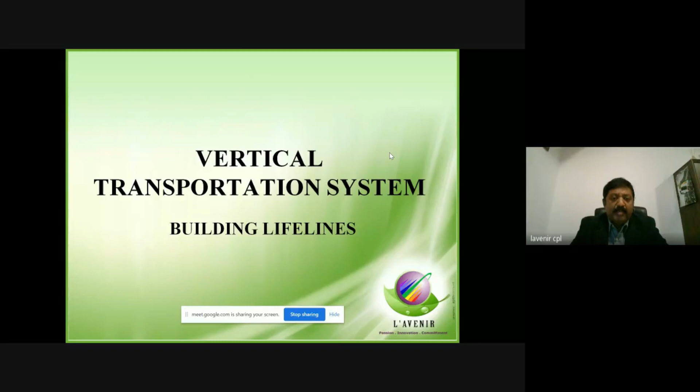I also publish a magazine called Elevator Digest to give a better insight into elevator technologies, firms, and emerging technologies in the field of vertical transportation. So what is vertical transportation? A high-rise building, like 10 floor or 15 floor, cannot happen without elevators, not possible. So typically these vertical transportations are like building lifelines. Now what are the products when I say vertical transportation consists of? They consist of elevators, escalators, and moving walks, or travelators as you can call them. These are the three important products which constitute vertical transportation.

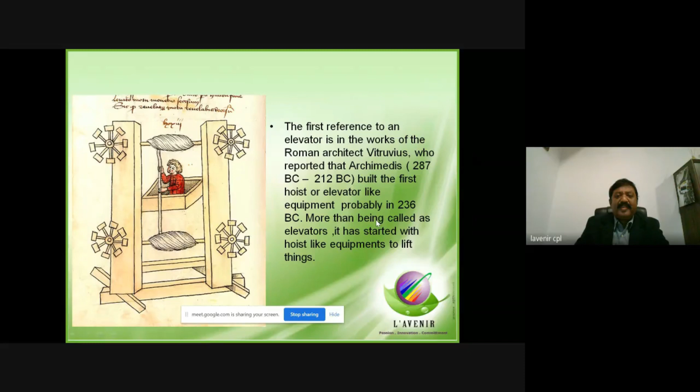So we'll start with elevators, we'll go a little bit into the elevators. The first reference for elevator is in the works of a Roman architect called Vitruvius in 236 BC. It was not like an elevator, but it was more like a hoist, meaning it had a weight as well as a counterweight. With the help of a pulley, it was moving up and down to lift loads, taking the mechanical advantage into view. So probably the first reference given to elevators was in 236 BC.

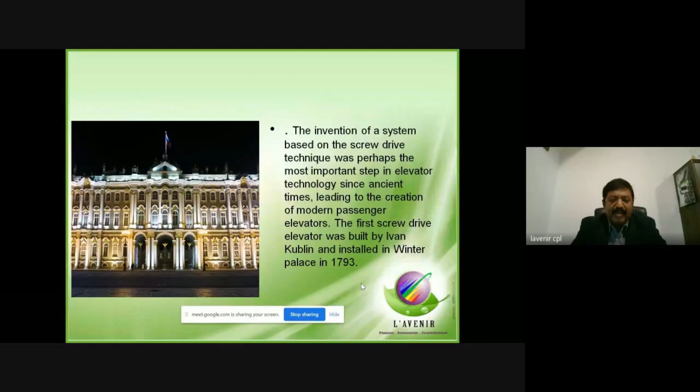Then there were a lot of technologies evolving as buildings started going up. People felt there is a need of a mechanical system where goods or people can be moved up and down so that they can build vertically. One of the technologies, as you can see on the screen, was at the Winter Palace in Russia, where Ivan Kublin built in 1793 a screw gauge using a screw drive technique. He constructed an elevator sort of thing, paving the way to a modern passenger elevator, you can say.

Again, in 1823, London had a tourist attraction called Ascending Room, built by two enthusiastic architects called Burton and Homer. It was designed as a tourist attraction where people could go up and have a panoramic view of London. So it was one of the first elevators, you can say, designed for public use, in the London Coliseum.

So while elevators were being built with various crude technologies available, whenever there were no safeties involved, in the sense whenever the ropes were cut or something like that, the elevator could fall. There could be a danger of people getting hurt.

So finally, in 1853, a gentleman called Elisha Graves Otis demonstrated his safety elevator in a very dramatic fashion in New York Crystal Palace.

What he did is, he had a platform with ropes. He raised the elevator or platform up to a certain height, and cut off the ropes. The elevator started falling down, but it stopped there because of the safety mechanism, or safety lock - in other words, a clutch mechanism which holds onto the rails on which the elevator was traveling up and down. He proved to the world that a safety elevator will not fall down.

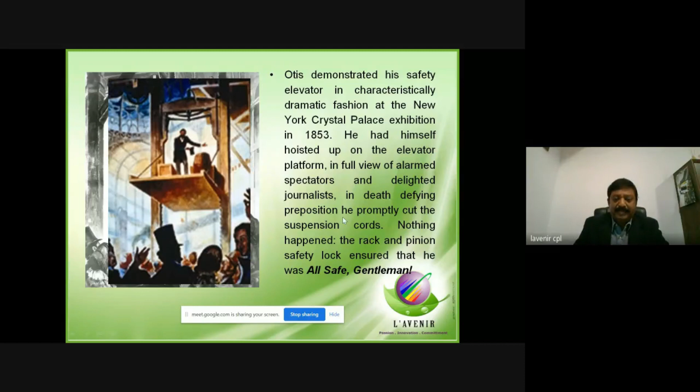So when we speak of elevators, there is a certain scientific study involved, which in elevator parlance we call traffic analysis and planning. For example, if you take a 15-storied IT building, it could have 15 floors with a population of 5,000 people. This is the basic input you have been given.

I'm sure all of you are aware of National Building Codes. National Building Codes Part 8, Section 5A covers elevators, Section 5B covers escalators, wherein there are certain directives on how the traffic coming into the building should be addressed - meaning people entering the building should comfortably, within the comfortable waiting time.

The elevator traffic should take them to their destination floor, and they should be comfortably traveling throughout the day - during the morning office up-peak, during lunch hour, or during down travel while going home in the evenings. So the objective of traffic study is to recommend or propose an ideal vertical transportation system where the handling capacity equals the traffic flow at the critical period with acceptable waiting interval.

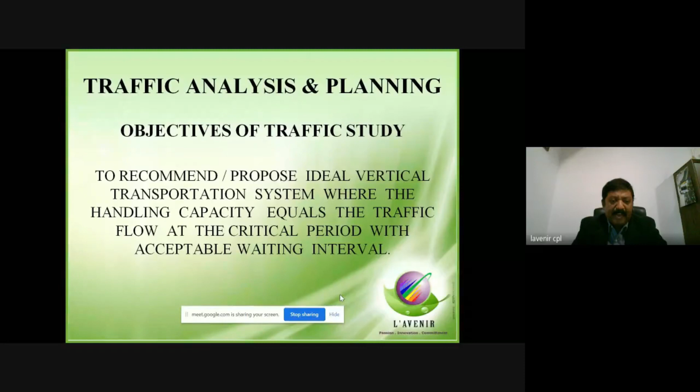How much percentage of the population is handled within a 5-minute period during peak time is called handling capacity, or the quantitative parameter. The qualitative parameter is waiting interval, within 25 to 30 seconds. There are certain guidelines given for waiting interval, which you can see in the upcoming slides, along with handling capacity.

So the key considerations for vertical transportation are: quantity of service, which is the handling capacity; quality of service, which is the waiting interval; and the traffic flow. Mainly we look at the up-peak or busy hour, so that elevator design can sustain itself for busy hour. How elevator operations are looked at is another part.

Like single elevator - I'll come to that in detail. A group of elevators can be grouped together, meaning if 6 elevators are there, they talk to each other, and whichever elevator is nearest will attend to the person who called it. It's very important to understand the population of the building, which is normally given by architects or the builder when the base or concept master plan happens.

Traffic study is applied mainly in residential complexes, shopping malls, hotels, hospitals, and infrastructure projects like airports and metros.

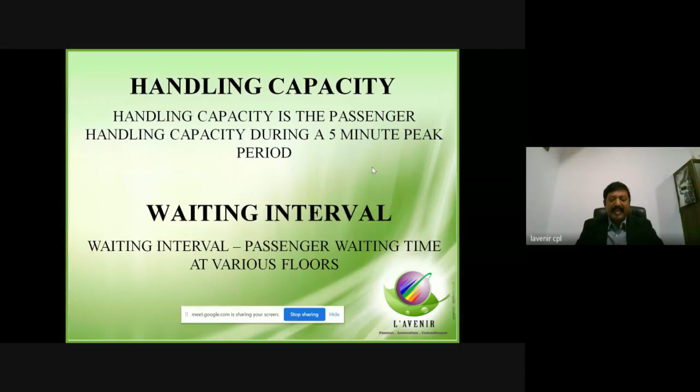Waiting interval is nothing but passenger waiting time at various floors between elevators. That means if there are 8 elevators, the interval between the arrival of elevators should be at certain desired levels, which we'll see in the subsequent slides.

Now, how did this happen and why are there different ranges of percentages given for different types of buildings? This is basically since elevators started, especially in Europe and the US—a lot of people, professors and vertical transportation consultants, elevator companies have been studying buildings, doing traffic studies.

Studies on elevators making trips from the ground floor to the topmost floor, stopping at various floors while going up, and stopping at various floors while coming down to the ground floor—so how many elevators should be provided? Based on various studies, over some 60-70 years, they have arrived at certain ranges that provide guidance to designers and consultants, so that if you achieve these desired parameters, you know the number of elevators provided is right for handling the building's population.

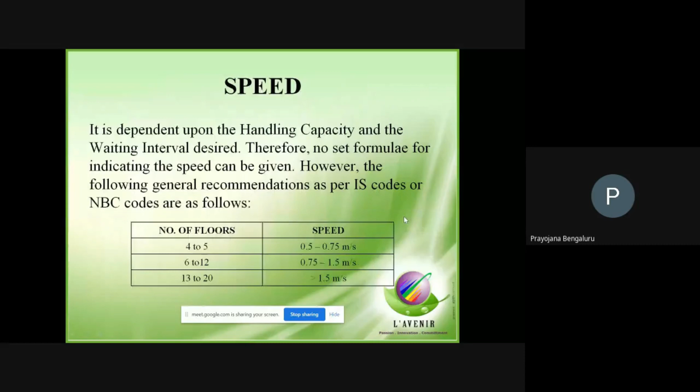NBC also recommends a thumb rule kind of thing: for 4 to 5 floors, 0.5 to 0.75 meter per second; for 6 to 12 floors, 0.75 to 1.5 meter per second speed; for 13 to 20 floors, greater than 1.5 meter per second speed; and anything above 20 floors, we will do a traffic study and provide the right kind of speeds.

In India, normally the highest speed we have given so far is around 6 meters per second. Even in Bangalore, in the center of the city near UB City Mall, Kingfisher Towers have 3 elevators running at 6 meters per second. There are quite a few elevators in Mumbai which are running at 6 meters per second.

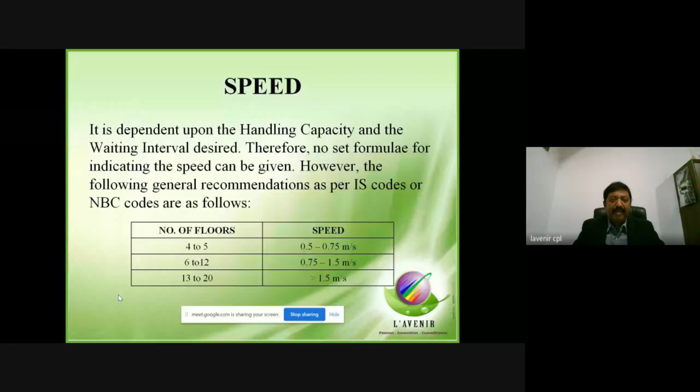Worldwide, the fastest elevator is in Shanghai Financial Center, which travels at 20 meters per second. In Dubai, Burj Khalifa's elevator runs at 12 meters per second. So depending upon the number of floors it has to cover, the speeds can vary, and speeds also have an effect on humans, which we will study as we go into the presentation.

Thank you. So now we look at machine roomless equipment. Machine roomless equipment is nothing but there being no machine room. Everything else is the same - pit, travel height or rise, overhead - all the same as machine room equipment because the speed and everything matches. So how does machine roomless vary from machine room equipment?

Machine roomless equipment was actually derived keeping the architect's design perspective in view. That means, if you see a nice building with a good elevation, that elevation could be spoiled by the machine room jutting out.

So what they did is they wanted to see if it's possible to accommodate the entire elevator equipment within the shaft, eliminating the machine room. In an IT building of 15 floors, when you eliminate the machine room, or if the terrace floor is devoid of any machine room, you get good floor space for various activities. Maybe a canteen can be provided, a beautiful garden can be provided. It leaves options to your imagination. So how has a machine roomless elevator come into picture?

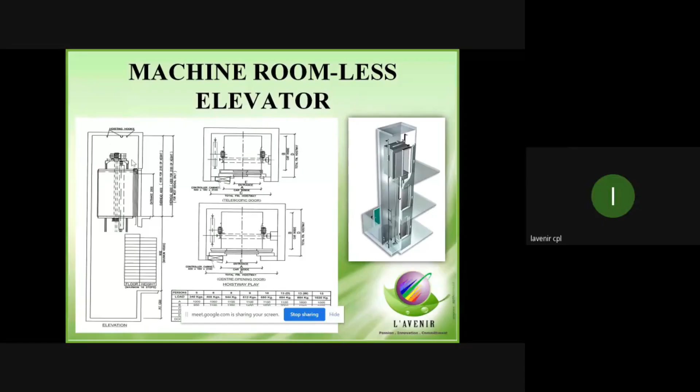In a belt driven system, the bending radius of the belt is almost 1/10th or even less than that of a steel rope. So when you bend this belt, the required shaft is small, the pulley is small, the shaft to run the pulley is very small, and the motor capacity is small - it comes as a gearless machine. So gearless machines are introduced, and the entire machine runs on channels inside the shaft itself.

The controller is kept somewhere here, the machine is on the channels, and the elevator runs up and down. If a service technician has to service the elevator, he goes on top of the elevator cab and services the machine as well as the controller. So this is the advantage of machine roomless equipment.

The disadvantage of machine roomless equipment is also there. A normal rope elevator has a certain stretch. Assuming the elevator is traveling at a high speed of 3 meters per second, and suddenly there is a power failure, the elevator stops with a heavy jerk. Normally this entire jerk gets transferred into the elevator car.

It is not transferred into the elevator car for the simple reason that the ropes provided are stretchable to a certain extent. The rope stretch absorbs a lot of vibration and jerk, so that the people inside are comfortable.

So at high speeds, if you use coated steel belt elevators in machine roomless systems - as I told you, it is coated with a polyurethane belt - this is end to end, totally fixed, so there is no stretch possible in that. So the jerk felt in machine roomless elevators, if running at very high speed, is high.

Machine roomless is okay for speeds up to 1.7 meters per second or 2.5 meters per second. Of course, even machine roomless equipment with very high speeds is now being introduced, with proper UPS kind of technology incorporated into the elevator.

So while we have understood the section, I will cover the plan. You can see the shaft here. This is the brick wall with a front wall and doors inside, and there is an elevator car. You can also see the counterweight here.

In the elevator shaft, the elevator comes with rails, meaning 2 rails for the car to travel. A guide rail is like a train track, how it travels horizontally on rails, except the elevator travels vertically on rails, and even the counterweight travels vertically on rails. There is a fixed distance between the rails, which can vary based on capacities and car widths. It is properly designed as per National Building Code guidelines, which is for the product manufacturer to worry about, not for us.

When you go to the top view, you can see the shaft here, the elevator car, and various squares which are all rope cutouts where the elevator ropes come into the machine room, travel over the pulley, and travel down again to the counterweight. You can also see a trap door, a machine room door, and windows for cross ventilation. This cross ventilation is very important to ensure the elevator machinery does not heat up as much.

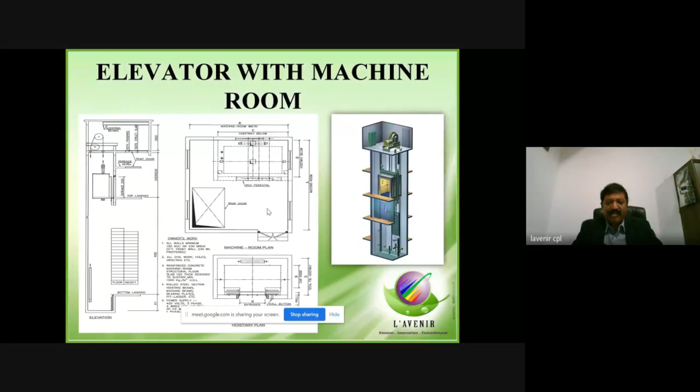So there are quite a few other technologies which are energy efficient. I'll come to it when we discuss green lifts.

Mr. Ashok, I hope so far it's clear, right? Yes, sir. Yes, sir. Yes, sir.

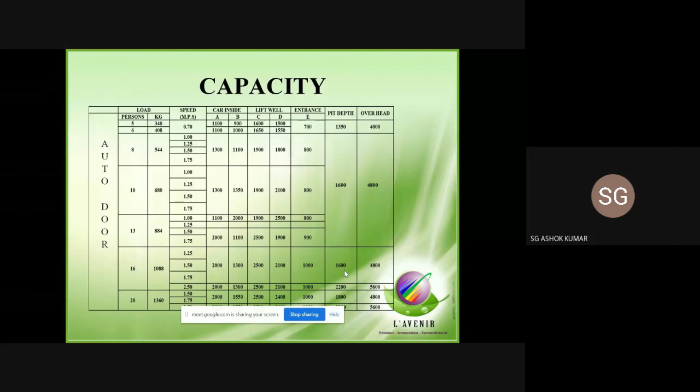You can proceed. Now, just to have a look, we have heard a lot of terms like elevator capacities, elevator speeds, elevator cars, elevator lift well or shaft sizes, elevator entrance widths, pit depth and overhead. For an auto door in general, let's take an example of a 10 passenger, 1.5 MPS speed elevator.

A 10 passenger capacity is 680 kgs. Why 680 kgs? In India, as per IS standards and NBC standards, 68 kg is taken as the per person weight. Based on that, the recent recommendations we have given to the National Building Code and IS committees is to come on par with international weight standards of 75 kg per person on average.

So if you take 680 kgs as currently done, a 10 passenger elevator at 1.5 meter per second speed has a car width and depth of 1300 mm wide and 1350 mm deep. The lift well required for that is 1900 mm by 2100 mm deep.

800 mm is the door opening. Normally a standard door opening should be 700 mm, as you can see for a small elevator of 5 passenger or 6 passenger, which are normally used in standalone residences or villa projects. Pit depths and overhead are given here as well.

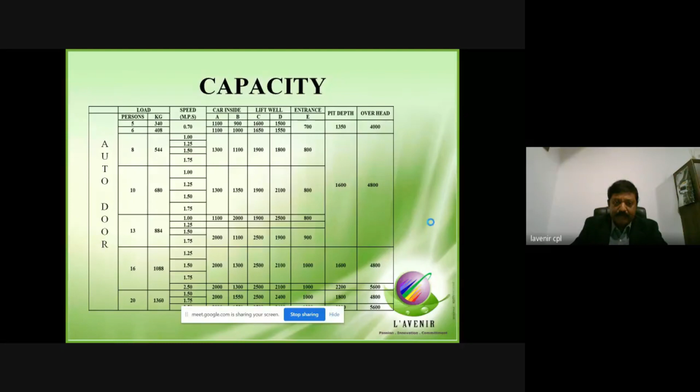Now we'll come to high-rise buildings and the elevatoring issues to be taken care of when designing for them. For example, we are designing for one building in Bangalore which is 54 floors, Presidential Towers in Yeshwantpur. In Hyderabad, we are doing a lot of office buildings which are 45 floors too. A high-rise building with high density population will have 5 meter per second, 6 meter per second speeds.

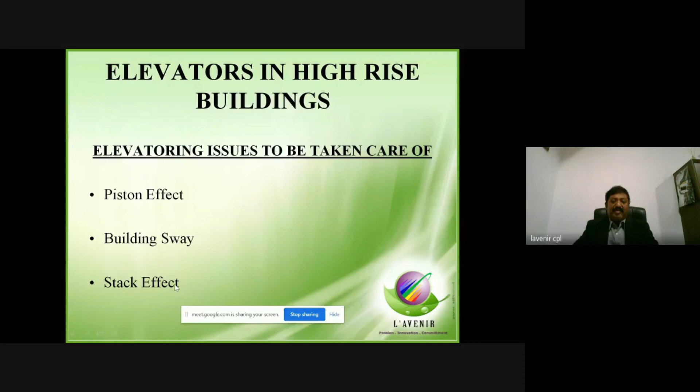Piston effect. Normally what happens is, in a single shaft, the shaft is covered by a wall and an elevator door, totally enclosed. Assuming an elevator is traveling at a rated speed of 6 meters per second, imagine a piston at that speed going in the enclosed shaft.

There is a gap between the elevator car and the hoistway. The air is displaced, and the displaced air travels at almost double the speed of the elevator. So if the elevator is traveling at 6 meters per second, the displaced air travels at 12 meters per second, which is very high. When it crosses the car, it can cause a lot of vibration and noise.

That needs to be mitigated. How do we do it? You need to provide a vent there to let the air go out. That means you have to design air vent holes to mitigate this piston effect.

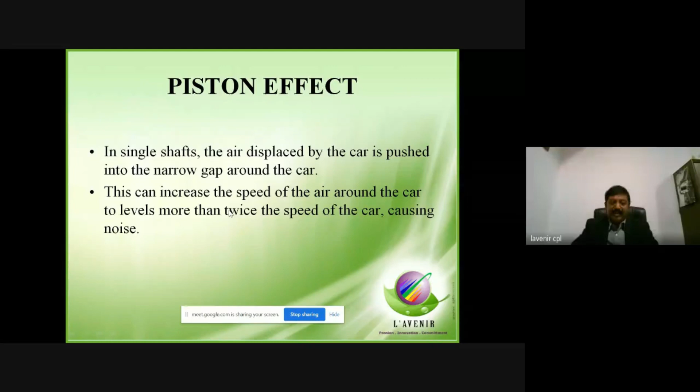So to reduce the noise level created by the air speed, air vent holes or pressure relief vent holes are needed. For speeds up to 2.5 meters per second, an air vent hole in the overhead area is required. Overhead area means from the topmost landing to the underside of the machine room floor.

For higher speeds, like 6 meters per second, you may require a couple of air vent holes at the bottommost floors, a couple in the middle floors, and a couple in the topmost floors, so that these pressure relief holes can be comfortably used.

It can be used when we have an adjacent shaft or an adjacent air duct. That means normally, when high speed elevators are provided, not just a single elevator is provided. There will be 4 or 5 elevators, as we told, forming a bank of elevators.

That means in the pit area, if you provide air vent holes in the partition walls, the elevator traveling in one shaft displaces air that goes to the next shaft, thereby moving air from shaft to shaft, creating relief and comfort to the people traveling inside, who are not affected by the noise or vibration created by the high speed of the elevator.

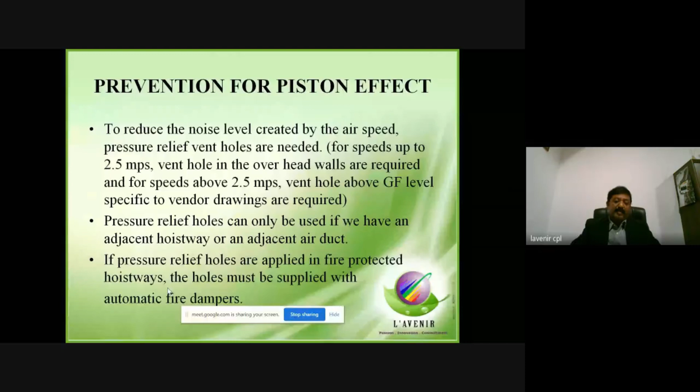Building sway: for example, if you take Freedom Tower in New York, or Burj Khalifa in Dubai, when you go to the top of such buildings, you can see that the building is swaying a bit, or there is a sway tolerance designed by the designers. This building sway matters because elevators, as we told, travel with the help of ropes.

The weight in the car and the counterweight in high-speed buildings are compensated by steel chains called compensation chains, overspeed governor ropes, suspension ropes, and the traveling cable. If these are long, over 150 to 200 meters, they tend to sway along with the building.

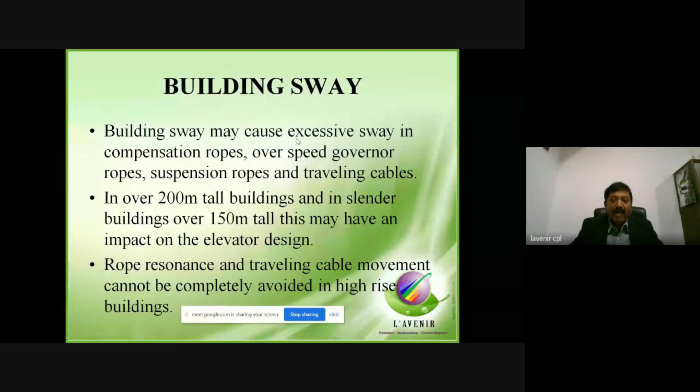So what we need to do is tell the product manufacturers to ensure there is an aerodynamic design given to avoid the building sway effect on elevators. So the sway behavior of ropes and cables is considered in the product design by the elevator vendors while installing the equipment, to prevent building sway.

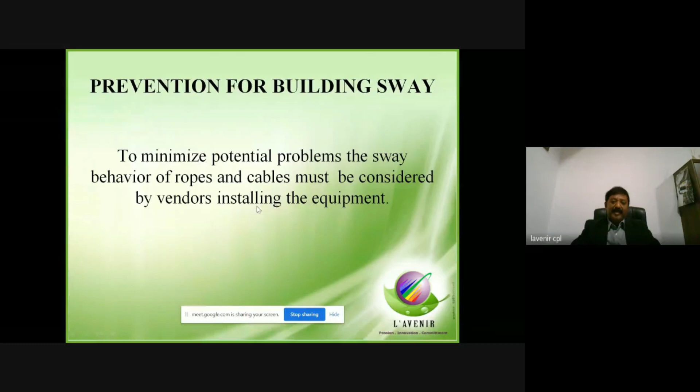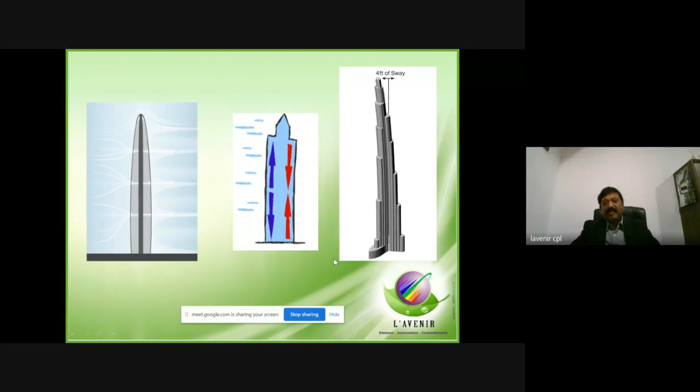So you can see Burj Khalifa has got 4 feet of sway. To mitigate that, various equipment is used, and elevators are one of them. So the product design has to be such that it takes care of this 4 feet sway.

Now something called a stack effect. Stack effect is nothing but the movement of air into and out of the building, driven by buoyancy, that means air pressure differences.

Normally in most IT buildings, the lobbies are fire protected, meaning they are controlled by air conditioning. If the elevator lobbies are fire protected, you don't really require mechanical ventilation or a fire ventilation shaft to the elevator shaft. If the lobbies are all fire protected, the pressure maintained is the same, so the fire cannot enter into the lobbies, and thereby the elevators are safe.

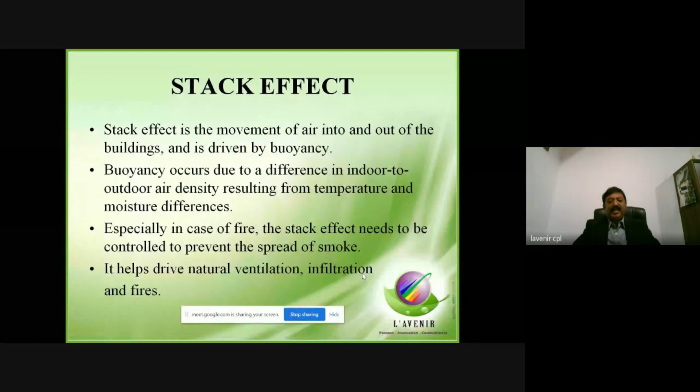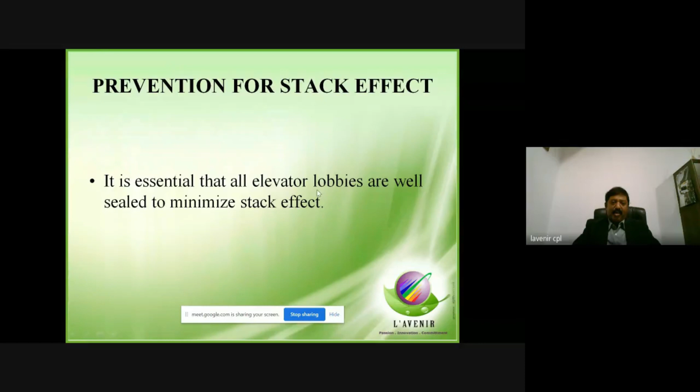So it helps in driving natural ventilation, infiltration and fire control. So for stack effect, it is essential that all elevator lobbies are well sealed to minimize the stack effect.

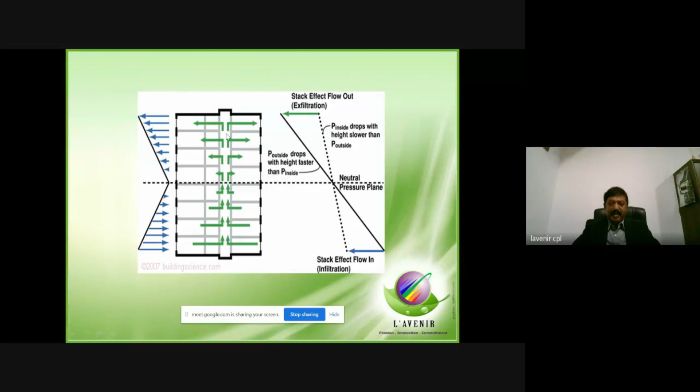So here you can see the air pressure, how the movement of air pressure is happening.

This gives rise to a lot of questions, like how to ensure smooth people flow when serving all the floors. That means what kind of traffic study is needed such that wait times are no more than 30 seconds after hitting the call button, how to gear up for an emergency like earthquake or fire, and how to consider depressurization in the cabin in less than 30 seconds and build a powerful braking system.

So if there is a fire in Burj Khalifa and somebody is on, say, the 140th floor, what happens? Can elevators be used in case of fire? Normally you would have seen signage saying that in case of fire, do not use the elevators.

Yes, that still holds good for India, because in tall buildings like Burj Khalifa, there are certain emergency evacuation high-rise building requirements where emergency evacuation elevators are provided at certain fire refuge floors. In construction or architectural studies, you would have seen that tall buildings are designed with refuge floors at certain heights, for example 4th floor, 8th floor, 12th floor, 15th floor designated as refuge floors. These emergency evacuation elevators serve those refuge floors, with separate lobbies created, totally fire protected, and powered entirely by a generator or secondary power, not the primary power, so it remains 100% available at all times.

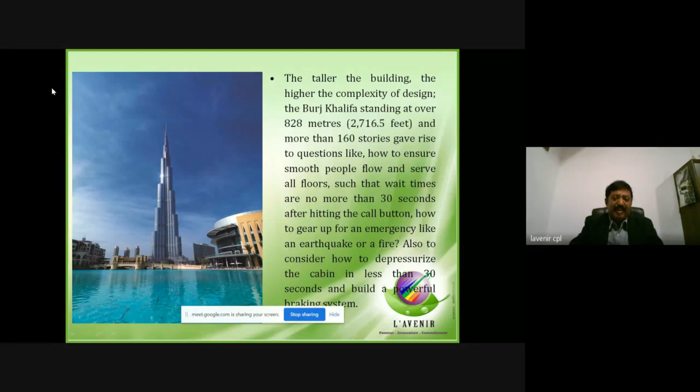So what innovations and intelligent, smart technologies are happening for future India? As I told you, destination dispatch control system. You would have seen in many buildings with 4-car or 6-car groups, you press the button and suddenly another elevator comes, and you rush to that elevator. Taking note of the elevator helps.

Normally when you press a button, the elevator sends a signal to the controller that a person on the second floor has pressed the button. Out of that 6-car group, the elevator controller senses whichever elevator car is nearer to you, and ensures that elevator will serve you.

In high peak situations, like 15-20% of the building population coming in between 9 a.m. to 10 a.m., more than group control, destination control systems are given. What does a destination control system do? It has a keypad showing the floor numbers, 0, 1, 2, 3, 4, 5, 6, 7. You press, say, 23 if you're going to the 23rd floor, and it will assign an elevator to you.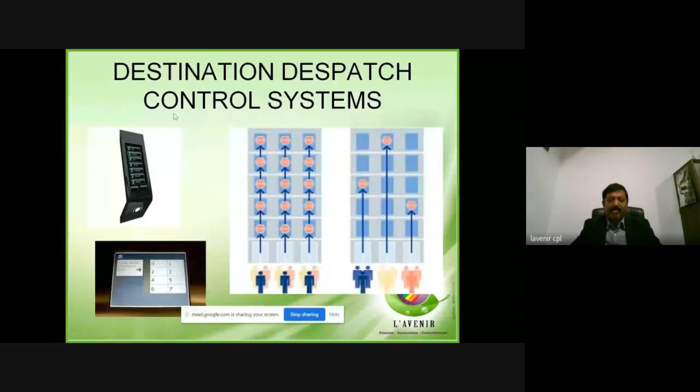Thereby, what is happening here? Your handling capacity becomes very efficient, your waiting interval becomes very efficient, and your equipment, the whole vertical transportation system, becomes very, very efficient because it is making only a reduced number of stops and starts. So this is a very interesting and important technology which is slowly becoming very common in most buildings.

Now, though we do not have this in India so far, you have something called double-decker elevators. These double-decker elevators are useful where land scarcity is there in certain buildings, like the financial capital of India, Mumbai. Mumbai has land scarcity. There, a building is designed, but they may not be able to provide enough shafts.

The building may require 10 elevator shafts. Now, if you do not have the space for 10, you can look at double-decker elevators. Thereby, these 10 elevator shafts can be reduced to 5 elevator shafts, and the elevator shafts are one above the other. People can travel in the lower deck, people can travel in the upper deck.

Here, the design has to account for this when you design double deck elevators. Why? Because when the lower deck is at a floor, the upper deck also has to be in line with a floor. That means you cannot have floor height differences, this deck also has to stop at the level of the elevator cabin as well as the floor level. Now in double deckers there is a little flexibility, where the elevator has a certain hydraulic system that allows a certain movement after the elevator stops, thereby addressing floor height differences of about 300 to 500 mm. You can still use a double decker.

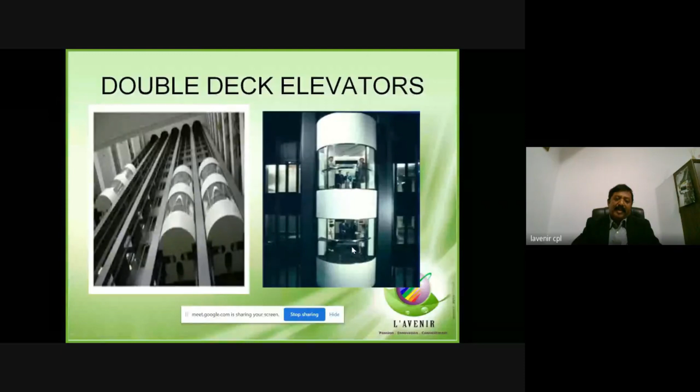Now when you are on the ground floor, you can take the lower deck elevator. How do you take the upper deck elevator from the ground floor? You need an escalator to go up, that means technically you will have 2 ground floors. So signages are very important in double decker elevators, where people designated for the upper deck will take an escalator, go to their upper ground floor, and then through a destination dispatch system key in their designated floor, the elevator comes and they move up.

Now there is another interesting technology also available, called twin, where 2 elevators travel independently in the same shaft. A German multinational called Thyssen manufactures this in their German facility, where I have actually seen this in action, the twin elevators traveling one above the other.

There is no big technology involved, but what happens is you require a larger shaft. That means the lower deck elevator is a regular elevator with a machine room, rope and counterweight. Here what happens is the upper deck elevator is provided with the help of a pulley room, and through the pulleys the ropes are designed to travel to the end of the shaft, where there is a machine. So it travels above and this travels below.

The only disadvantage is the lower deck elevator cannot reach the topmost floor, and the upper deck elevator cannot reach the bottommost floor. But all said and done, it will save a lot of space, and within the reduced space you can have more number of elevators. This is called a twin elevator.

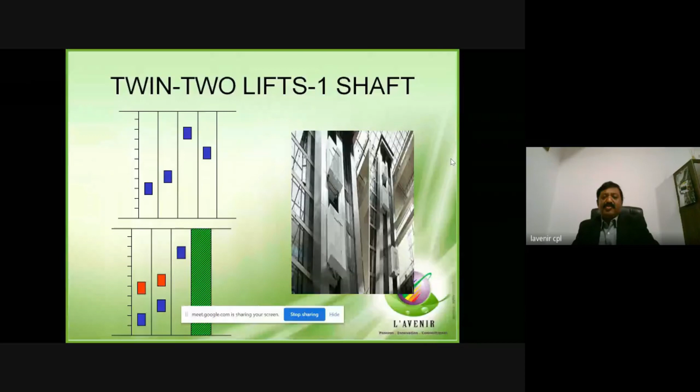For example, a residential complex with blocks A, B, C, D, E. You are on the 5th floor of block A, and you want to go to the 20th floor of block D. You can take one elevator from block A and reach the 20th floor in block D.

These elevator cabs work on a technology similar to bullet trains, which you've seen in China and which are coming to India soon. They work on magnetic levitation, meaning there's a gap between the rail and the train.

Similarly here, there is a gap between the elevator cabin and the rail, and at each designated floor there is a disc provided. When the elevator is traveling vertically, it comes and stops, with a disc behind it that is in line with the railing. The disc rotates so that the cabin moves horizontally and stops. If the disc rotates again, it can travel vertically.

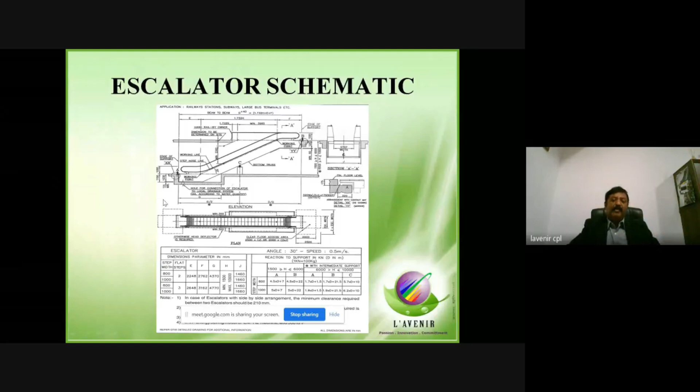There are certain innovations going on where for architectural purposes, spiral escalators are provided. I have seen these escalators in Caesars Palace in Las Vegas, where quite a number of them are provided.

Just to give you the complexity commercially, a normal escalator would cost around 25 to 30 lakhs. A spiral escalator of the same height would cost you around 8 to 9 crores. Yeah, you heard me right, it is 8 to 9 crores.

Now you can see moving walkways or the travelators. These are mostly used at a 0-degree angle to cover long distances where people do not want to walk, like in airports when you move from gate to gate in the terminals.

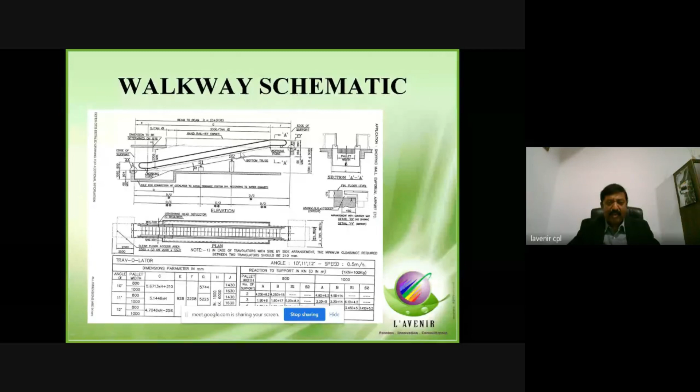And there is another use in hypermarkets. If you want to carry your trolley to the first floor of the hypermarket or supermarket, you take your trolley and go at an angle of inclination of 10, 11 or 12 degrees. This also has a step width like an escalator, like 800, 1000 mm or 1200 mm depending on the requirement. So this travelator is typically based on the same principle as escalators.

Because of the paucity of time, I'm rushing through a little bit. Now, what are the things to remember from a civil point of view when designing elevator shafts? You have to ensure that elevator lift wells or lift shafts are clear plumb sizes. All plan dimensions given in the NBC, the shaft sizes given, are clear plumb sizes after plastering. So you have to ensure that tall buildings normally are given certain plumb tolerances.

Why are plumb tolerances given? Because as the elevator shaft progresses, there can be plumb differences. But while plumb differences can be there in the shaft, the elevator car has to travel in a straight line - there cannot be any plumb differences. That means as the elevator travels, there is a guide rail to the left and a guide rail to the right, on which the elevator cabin travels. The distance between the guide rails has to be uniform.

If the distance between the guide rails is 2000 mm at ground floor, even at the 30th floor it will be 2000 mm only. So you can provide for plumb tolerance, not very much, to the extent of 50 to 100 mm in the shaft. That means the civil engineers constructing it and the elevator vendors involved in the project should check the plumb tolerance every 3 to 5 floors so as to avoid chipping later.

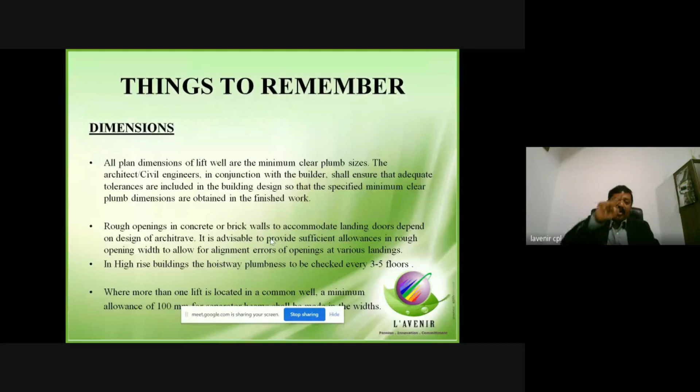And elevator shafts normally have to be constructed on 3 sides. The front wall should not be constructed till the elevator door entrance is fixed. Why? Because the elevator car is traveling, and the elevator car has a center line for the doors opening to left and right.

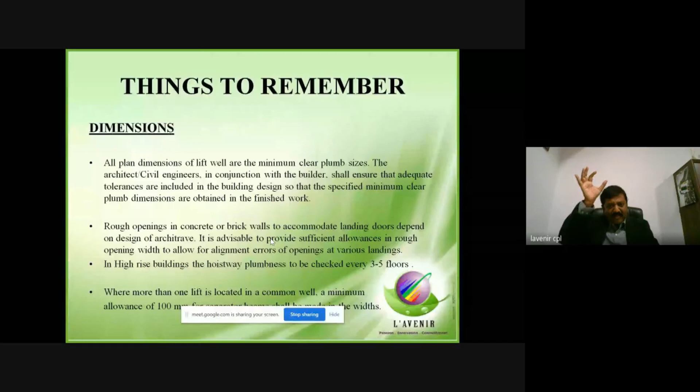Landing doors are provided at all landings. The center line of the landing door and the center line of the car door have to align correctly. How does this happen? When you take the plumb and align exactly all door entrances from floor 0 to the 30th floor in one single straight plumb line, then when the doors are installed, the alignment is very, very clear. So I'm spending so much time to stress upon you that this plumb tolerance is very, very important.

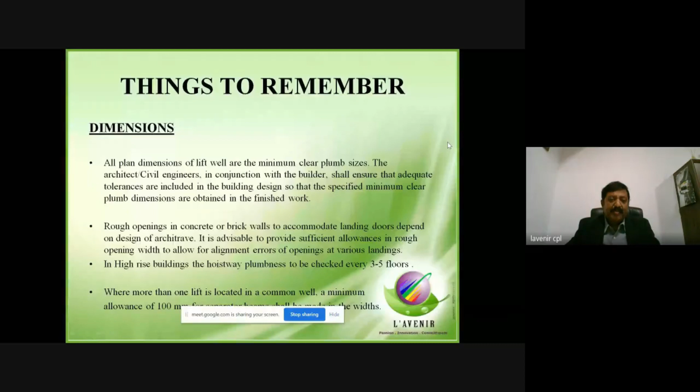Now, installation and maintenance require a lot of coordination. You need proper understanding on various equipment going into the building - the civil site engineer, the architect, consultants, lift manufacturer, electrical engineer, and mechanical engineer should have proper coordination. Information should be exchanged through design review meetings from installation through to maintenance.

Now all electrical works should align with the Indian Electricity Acts. The entire elevators normally conform to IS standards or NBC 2016 standards, which we are currently using. Then, as we have already discussed, there is conformity required with fire regulations, and there are regulations for the fireman elevator.

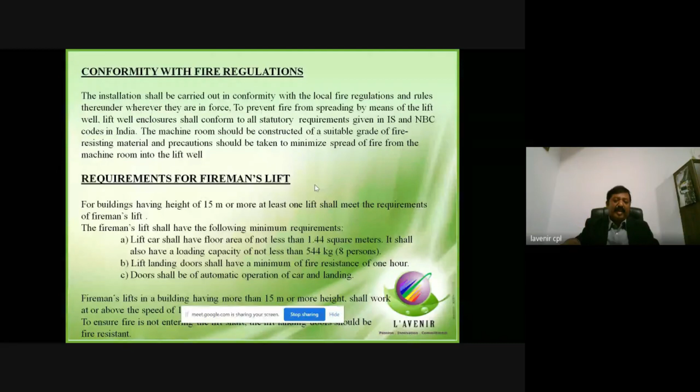A minimum building crossing a height of 15 meters should have one fireman elevator - that means 544 kgs capacity. The car area should not be less than 1.44 square meters, and it should travel at a speed of 1 meter per second.

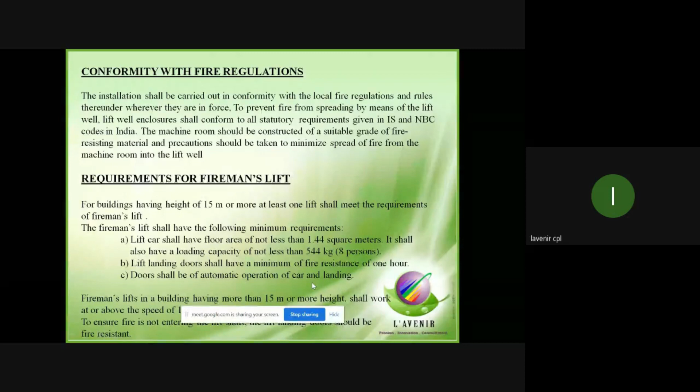Safety guidelines in construction site. All construction sites, till the elevator landing doors are provided, should be given entrance barricades, which the elevator vendor does. For scaffolding, nowadays mostly people are using steel scaffolding.

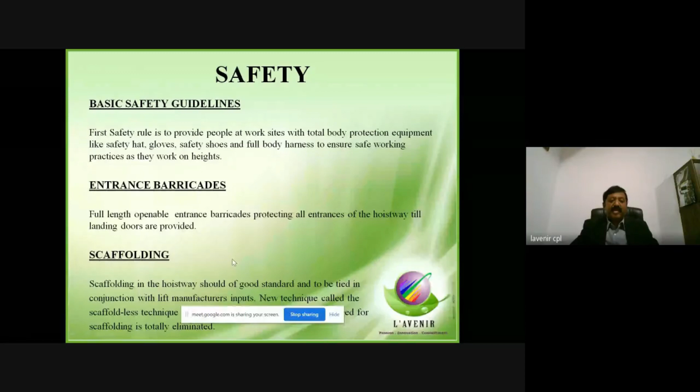There will be heavy duty safety nets provided in the hoistway at intermittent levels so that people should not fall down, and fall protection on the car top so that any tool falling down does not hit people working below. Normally in an elevator shaft only 2 people are allowed to work at a single point of time, because if 3-4 people are working at different points there could be fall hazard issues.

Lighting and ventilation in the machine room and hoistway should be adequately provided. There should be a proper pit ladder to enter into the pit, because high speed elevators will have deeper pits. Waterproofing should be done.

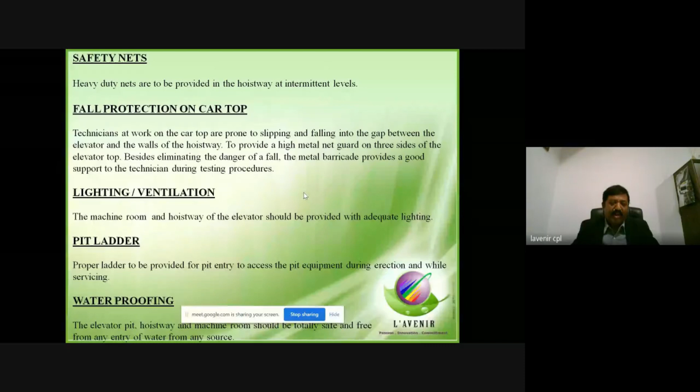Fire elevator lobbies should have a slight slope facing away from the elevator entrance, so that water on the floor does not enter into the elevator shafts. Also, there should not be any common wall between the lift machine room and a water tank. That should be very clear, because code says you should not have a common wall where there could be issues of water seepage into the lift machine room.

Coming to green elevators, we've discussed gearless technology. If gear is not there, gear oil is not there, so no oil lubrication is needed. The ropes are substituted with coated steel belts, which are energy efficient because it's a smaller machine consuming lesser energy. Coated steel belts do not require rope oil, so oil is not used.

Another important point is regenerative drives. Normally, when an elevator travels with a heavy load up or an empty car going down, the motor acts as a generator and generates electricity. This generated electricity is transformed by the control into heat energy, dissipated into the machine room through resistors. In a regenerative drive, that electrical energy is instead captured and fed into the building grid where it regenerates clean power, which can then be used for various other purposes.

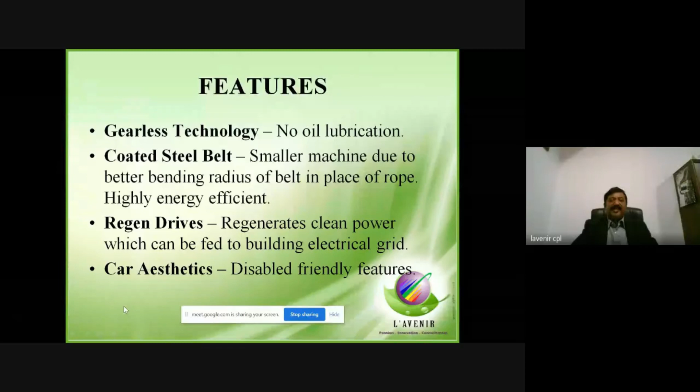Car aesthetics is also a green feature, because you are providing disabled friendly features.

In one of the projects, I will tell you, it happened in Electronic City, Bangalore. There were 17 towers under construction, and for getting the elevators, the planning engineers ordered all 17, but the progress did not happen uniformly at the site. All 17 towers would not come up requiring elevators at the same time. The machines arrived, and we could not store the elevator materials for more than 12 months.

These are high value products and have to be properly stored, which requires storage money, space, and everything. You need to put security for that, because a lot of construction sites do not have a proper security system. The elevator agency has to guard the materials, even though the developer will say this is the responsibility of the elevator agency.